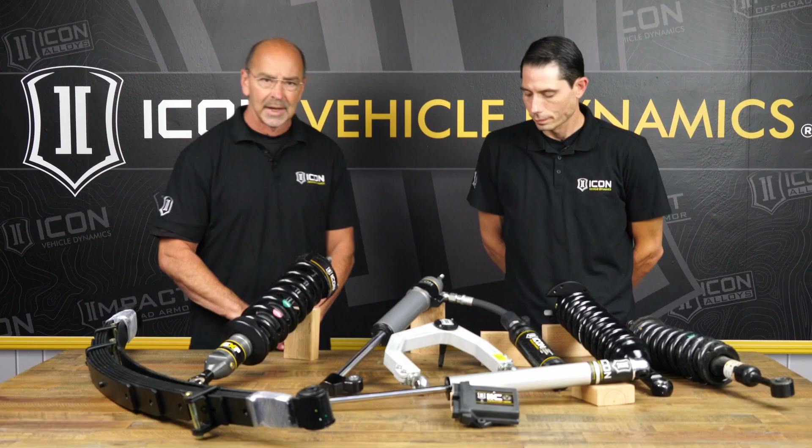All right, well today we're going to talk Toyota, we're going to talk Tacoma, we're going to talk Tundra. We're going to start with our shock systems. There's two different ones and a brand new one we're really excited about, and we'll walk all the way through the front, get back to the tail end of those trucks and talk about this.

Scott, let's talk about the EXP Series. This is newer for us and is an opportunity to use the OE spring shock. Then we're going to get into what we'd think is let's do it right, let's go full Icon. So the 2.5 EXP Series is kind of our interim before you get into the full threaded body coilover. It does reuse the factory coil spring for all the applications, especially these days since coil availability is tough.

It makes product availability much easier to come by. So we can still build a full 2.5-inch diameter aluminum bodied shock here with our internal reservoir, just like our regular shock series. The only real difference is the utilization of the factory coil and the coil hardware. So it gives you the quality of the shock, reduces the price as you move through doing everything to your truck.

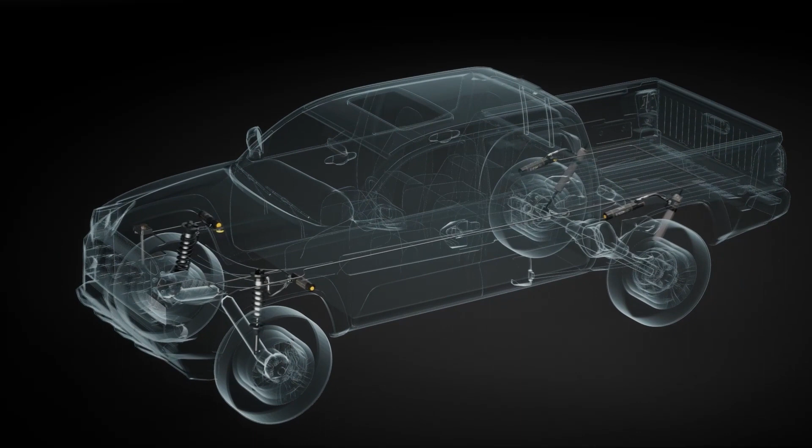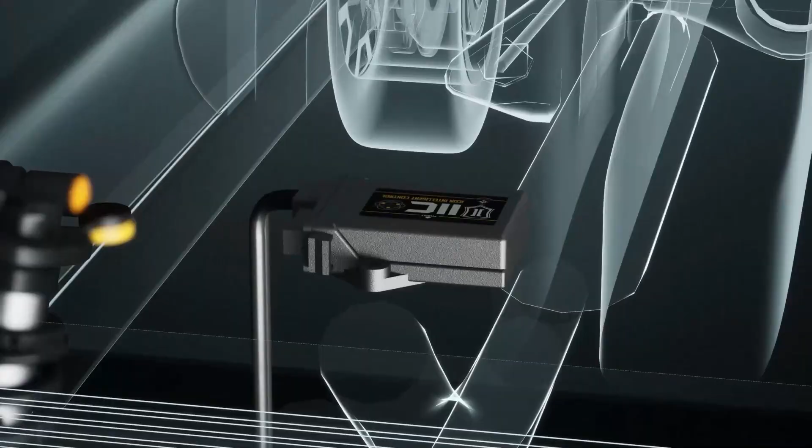So now on the Tacoma and Toyota Tundra, we're also looking at the electronic valve system. The valve itself we call the CDE valve, or compression damping electronic valve. This is all controlled by the IIC module, or the Icon Intelligent Control, that lives under the hood. Basically, this is a solenoid valve that actuates and controls the flow of oil into the reservoir as the shock is compressing. Very similar to how the CDC valve does, but this can react every 40 milliseconds, much quicker than we could ever hope to do.

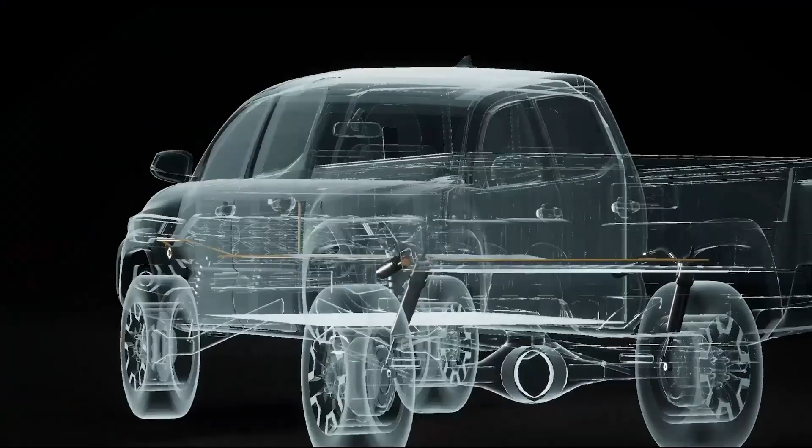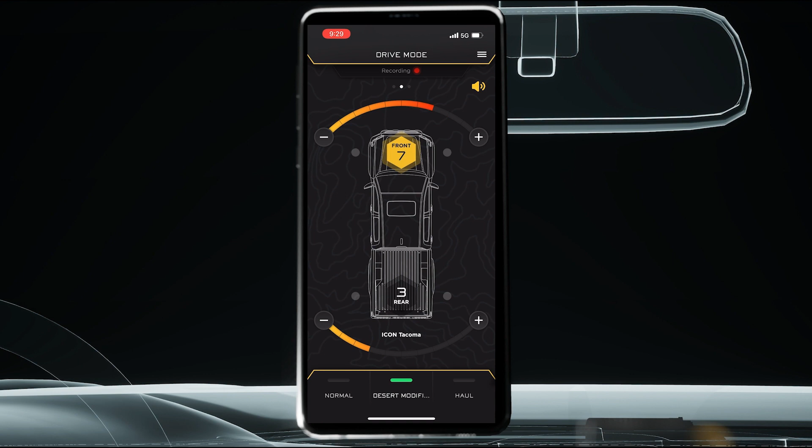Utilizing the accelerometers and algorithms and your user settings that you would set up through the IIC app, basically the shock will do all this on the fly. So it's constantly adjusting damping based on what it's sensing the truck is doing. You can set your shocks nice and soft and keep that ride quality that you're after, but then if something sneaks up on you, a big hole or something, you don't have to worry about slowing down. It'll detect it, crank the shocks right up to compensate, and then dial them right back down to where your baseline was as soon as you're over it.

So that's your IIC controlling your CDEV on your 2.5 stage system, right? Correct, exactly. Check that out.

Now we got this really cool set of springs back here. When we get to the back of the truck, there's a couple of options on how somebody's going to buy through this. Let's walk through that leaf system.

So this is what we call the multi-rate leaf spring, and it's available for several applications. This one happens to be for Tacoma. Same thing for Tundra, just a little bit bigger looking. This would basically allow you to configure the spring for 3 different spring rates based off of what kind of load lives in the bed of your truck.

These days with overlanding or even work trucks, or any number of different things, guys are modifying these trucks so that there's stuff that lives on the vehicle full time. So when you're trying to set up your ride height, taking that into consideration is very important. That way you can set it up so the rear is sitting at the height that's appropriate for the front, so we lift the rear, then we lift the front, and get that level that most guys are after. As a bonus, this also gets more travel when paired with an appropriate shock.

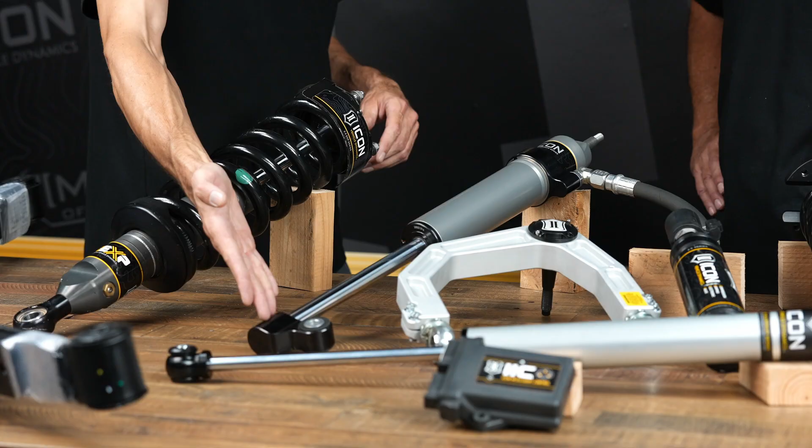So we've already talked about this rear shock here with the CDEV. But the shock itself, this we call the RXT version, another acronym for you. RXT stands for rear extended travel. And the magic is really coming from this trick rod end here. This offsets the rod end from the end of the shaft, as opposed to... Right, so that allows you to fit a physically longer shock in the same mounts on the truck.

So apples to apples, this rear 2.0 for a Tacoma here gets X amount of travel, it has this compressed length. The RXT shock has longer travel comparatively, the same compressed length, but a longer extended length. The two paired together is over a 25% increase in travel on the rear of these trucks, which if you're wheeling them, makes a big difference off-road, just because it'll keep those rear wheels more planted and cut down on that bucking that the Tacomas and Tundras really want to do when you hit something in the rear.

So it makes it a lot smoother.